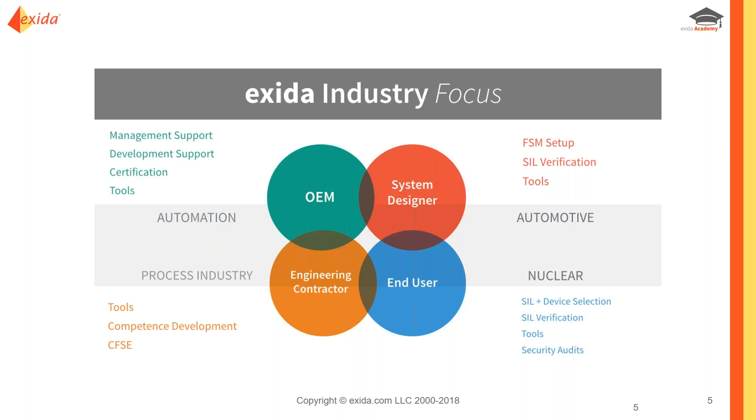We do anything in functional safety, alarm management, cybersecurity, etc. We get involved with the complete supply chain of functional safety across all the different industry sectors. For example, we're going to be doing a lot of fire and gas as we see it becoming an increasing demand in the industry. We deal with anything from original equipment manufacturers who need product certification through to the end users that will actually use these products. That's why we get involved with that complete supply chain or life cycle, anything with training, consulting, procedure related, functional safety, security and reliability is what we focus on. There are 6 different areas we help in: consulting, tools, product certification, training, reference material, and professional certification. Today's webinar will focus within consulting and product certification, sharing the value and why people are even getting things certified, and the consulting aspect is where we'll be talking about flame mapping.

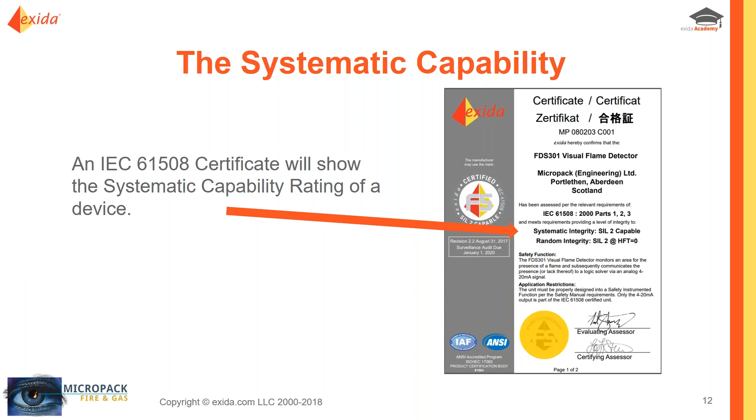When you go to the second obstacle that is cleared, that's your architecture constraints. This second obstacle is either done by the complexity of that device or by field operating history. So you can also call this Route 1H or Route 2H, or you can actually meet architecture constraints both ways, doing 1H and 2H.

Now, there's different SIL tables in 61508 and 61511, and you want to determine this architecture constraints depending on the SIL rating. So the end user will use these tables when they want to develop and create their SIFs. So when you look on the certificate, you'll see that the end user now knows how to calculate the architecture constraints using the 61511 table.

So they can say, HFT equals 0, I can go to this table, okay, it's SIL 2, okay, this is what I need to do to develop my SIF. And so now you're giving them guidance on how to overcome this barrier.

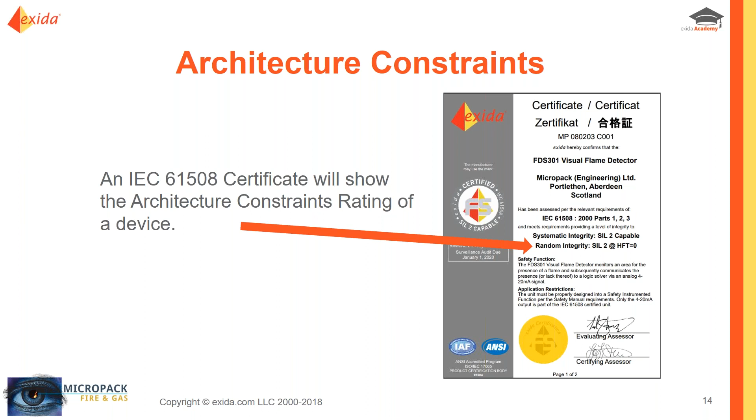The third barrier. When you clear this third barrier, this is when the detector is certified for failure rates for that PFD calculation.

If you're not too familiar with the PFD average calculation, it's basically an equation given in the standard. It has 9 different variables to achieve this PFD average, this probability of failure on demand, based on dangerous failure rates, automatic diagnostics, proof test coverages, test intervals, maintenance, and other conditions controlled by that product and how the end user is going to use this detector or device. From the product certificate, the end user now has the ability to take those failure rates of the device, and with knowledge of these other variables they control, such as how often they're going to be testing the SIF, they can now calculate that PFD average for the SIF.

Every time I talk about this subject, I put that disclaimer in here: it's important to note that this PFD average is not a value that a device manufacturer should be providing. There are too many of the 9 variables from the equation that are going to have to be assumed if that manufacturer wants to provide such a number. So you need to make sure that this is left up to the end user. And if you do see a PFD average number, please do not use it unless you know what those variables are before you use it, right?

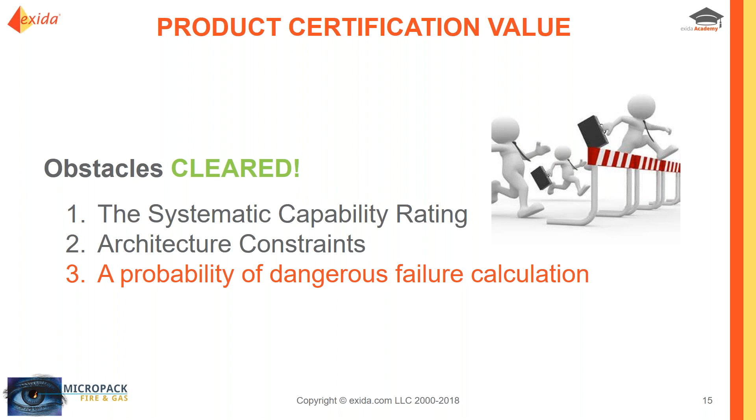That's why one thing for us here at Exida is we used to give examples of how to calculate a PFD average in our reports. We removed it because people were using that as an actual number for their product, and they didn't realize it was just an example. So we've removed that to eliminate that confusion.

So now when you do have these products getting certified, certifying bodies now, for us anyways, publish these failure rate numbers with the different failure modes for the end user. They can now take these failure rates and apply them to their PFD average number.

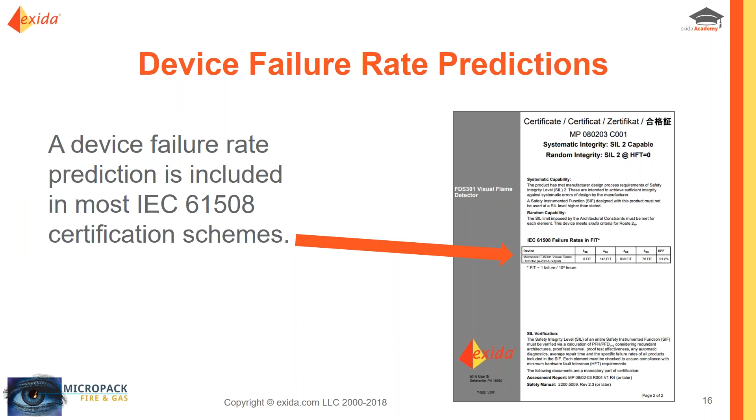If this is something that might be a little confusing, if you need some help, you'll have our contact information at this webinar. Send us an email. We have white papers on how to calculate this PFD average number, because we'd rather help you get through some of these hurdles, whether or not you're a customer of ours, just because I'd rather someone do something correctly than move through thinking they've done something correctly, if that makes sense.

So what is the value to those manufacturers that are getting these products certified? Well, this third-party review of the product, our main objective is to find faults in the design resulting in a lower lifecycle cost, right? We want to find things before there's a redesign or they have to rework things.

And obviously it helps increase the marketing and sales. Why? Because now end users can use something with the assurance that it's already gone through these 3 different obstacles. Sure, there's a cost associated to get something certified, but the goal is there's now a lower risk and an increased savings in the long term. And of course, with these reduced failures at the manufacturing site, there'll be less rework in the field.

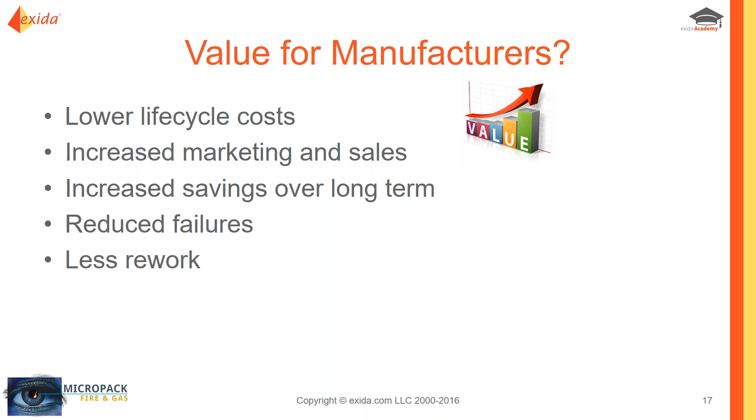What about for an end user? What are the benefits of a product that's certified? Well, hey, you now have a product that's gone through the rigor. It has a better quality management system. It's going to have less spurious trips statistically. You'll have increased safety. You'll have less field failures, a more robust system.

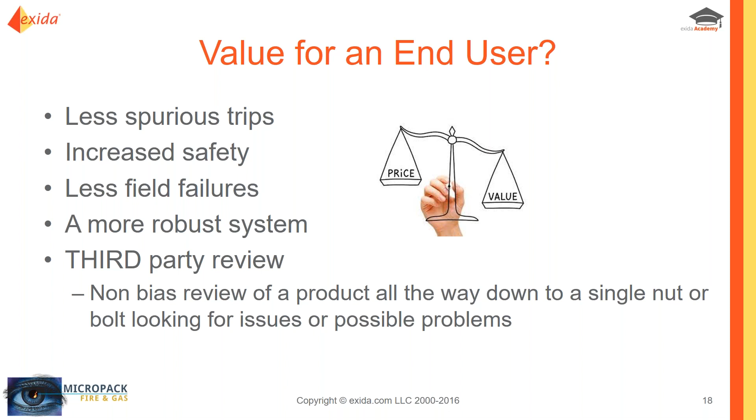And of course, now you have someone that's looked at this product that you are buying. We have a completely non-biased review of the product all the way down, because we do that FMEDA to it, all the way down to the nut and the bolt, looking at issues for possible problems. So we break down every product all the way down to its single components and then build it back up, assigning failure rates to each and every part. And that's where the true value lies and why people are getting products certified.

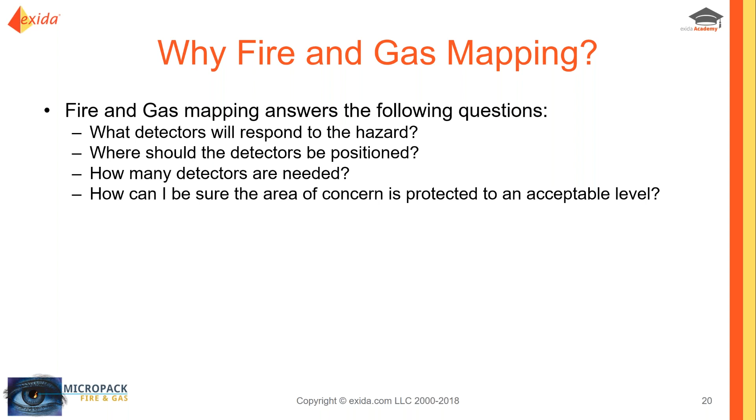In relation to these factors, this webinar is going to show how flame mapping actively contributes to project certainty by looking at how a designer would demonstrate optimised coverage, how they would reduce the time of design compared to the traditional methods, and ultimately we'll move towards producing a detailed design which meets the project objectives with respect to flame detection and also keep project costs competitive with respect to the number of devices that we actually require.

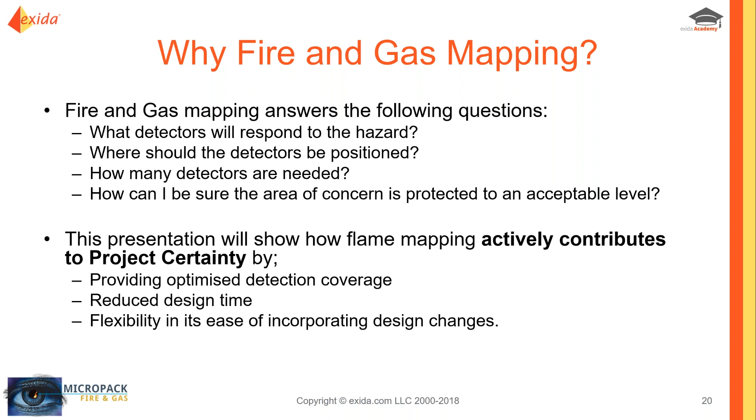So what is fire and gas mapping? Well, it's a bit of a misconception that fire and gas mapping is simply the output of a piece of software. There's two primary factors in what's commonly referred to as fire and gas mapping.

One, the engineering knowledge, which is fundamental in the design. And the second part is the modelling. Each of these factors in fire and gas mapping is crucial, and an adequate design rarely applies only one of these two phases.

With engineering knowledge, the engineer has to identify the hazards of concern such that the escalation potential can be determined. Ultimately, we're limiting the extent to which a fire can grow and cause further damage. So this risk analysis, ultimate performance definition is crucial to an optimised as well as a safe design.

The engineer also has to review any mitigation actions which are required or already in place to make sure that the inputs to the modelling are accurate and that the overall system will actually operate as we want it to operate.

The engineer must also review the detector contributions in order to decide which detectors perform better than others or more effectively. This is not simply from a percentage coverage standpoint though. The engineer has to be able to determine if a detector, if it has a low percentage, is actually reviewing a particularly highly hazardous piece of process. And equally, a detector may have a high percentage coverage, but actually is monitoring a low or negligible hazard area. This detector would probably be able to be optimized.

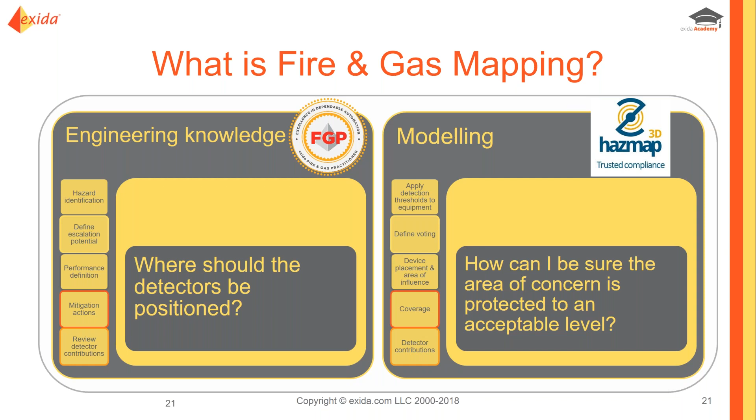The modelling outputs of detector contributions and coverage are obviously also crucial and have to be referred back in the loop to the engineering knowledge to try and determine if our system is adequate.

So looking specifically at flame detection, we first have to appreciate that what we intend to achieve with our detection devices is mitigation. Flame detectors themselves are safety barriers, trying to reduce the escalation of an ignition incident.

We typically expect flame detectors to operate at the second point in, around about fire escalation. Flame detectors are not typically designed to be able to detect the ignition or the incipient stage of a flame, so we actually have to wait until the flame becomes a visible or flickering flame to allow our flame detectors to actually detect that source.

We wouldn't want the fire to continue undetected into the large uncontrollable fire stage, and certainly into the secondary fire stage. So we want to implement our flame detectors to be able to detect small fires to prevent them from becoming much larger fires.

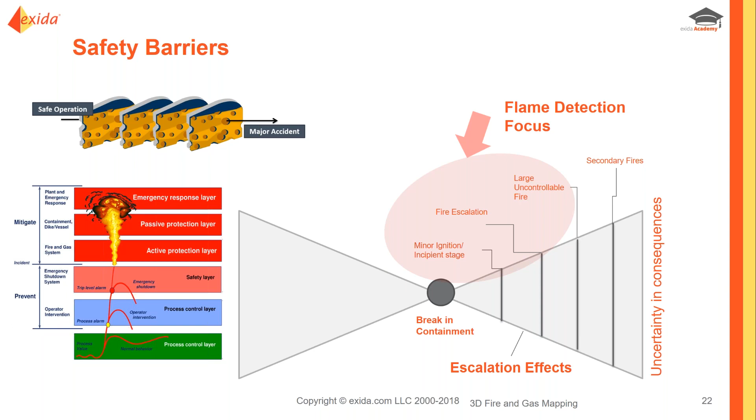So I mentioned earlier on performance targets. Essentially, to summarize what a performance target looks like, it's a formal statement of what fire our detection system should be able to detect, or what we would want it to be able to detect.

If we were to design a performance-based system, which is suitable for the hazards in question, we have to set this target fire size to push us towards not only precise coverage, but also the equipment which is going to pose us the greatest hazard. We don't have guidance like that in NFPA 72 or BS 5839 to design the flame detectors against, as we're typically looking in unpredictable environments, especially if they're external hazards. So this inevitably leads us to performance-based design.

The notion of performance targets is summed up by deciding if you would want the same level of detection in an area where the hazard is a high-pressure gas jet fire from a compressor, for example, compared to a diesel storage area with a finite diesel pool fire as the credible hazard. It's obvious that we don't want the same level of detection in these areas.

Therefore, we can apply a risk-based approach to determine a target fire size specific to that area, which would become difficult or impossible to control. This would essentially then become our performance target with respect to detection for that area or that piece of process.

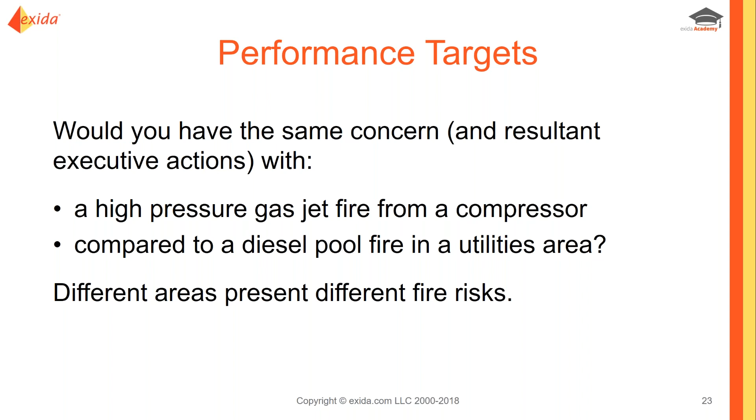If we set our performance target at the size of fire that a gas compressor could result in if it's ruptured and ignited, then we can't credibly detect any fire prior to this stage. Therefore, with a system like that, little or no mitigation is actually provided by the flame detection system.

We also have a special risk grade here, which is quite common, and that's really for areas where none of the standard grades are actually suitable for the hazard. We often refer to this grade as the get-out-of-jail-free card, as the designer gets to choose what size of fire they want to detect to and what the resulting control action should be.

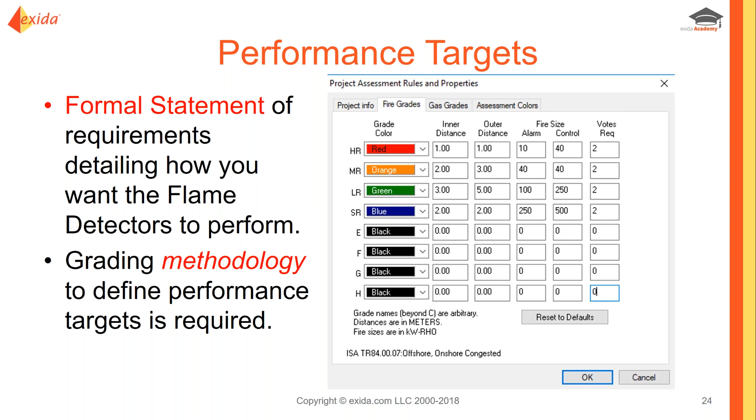So, how do these performance targets actually play into our flame detection mapping? Well, crucially, flame detectors operate based on the inverse square law.

The inverse square law, to put it simply, means that when a fire is small, the flame detector has to be much closer to that fire source to detect the resulting alarm, whereas larger fires can be much further away and achieve the same response. These distances are calculated using the inverse square law to determine how far a specific fire size can be from a detector to give the alarm response.

If we take the standard N-heptane pan fire, for example, which is approximately 40 kilowatts in radiant heat output, if a detector can detect at 30 meters, and we reduce the distance of the detector to the fire to 15 meters, the smallest fire that detector will be able to detect is a 10 kilowatt fire. So we've halved the distance between the detector and the fire, but the smallest fire it will be able to detect is actually a quarter of the size rather than half. And this is the inverse square law in action.

This method works reliably up to fires of about 500 kilowatts in radiant heat output or greater. We start to lose accuracy at that point with sensor saturation and various other environmental factors. But typically you wouldn't want to target fires larger than that anyway in the design, as you lose your ability to mitigate effectively above that range, going back to the safety barrier analysis earlier.

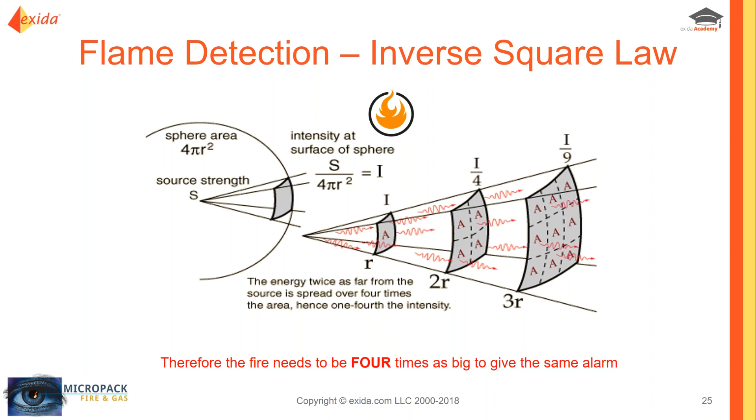They focus in on desensitization of flame detectors in process environments or external environments. And essentially we need to be able to think like the detector that we're placing in the area. It's a highly misunderstood area of design, and desensitization is often overlooked, but it can have serious consequences on site if we don't account for this accurately.

Often engineers will review the device data sheet and assume that the detection distance listed there to the square pan fire is gospel. Now, this is rarely the case, regardless of the technology. A lot of those tests are under lab conditions, and then we place the detector out into an external environment, for example, and the results can change quite drastically.

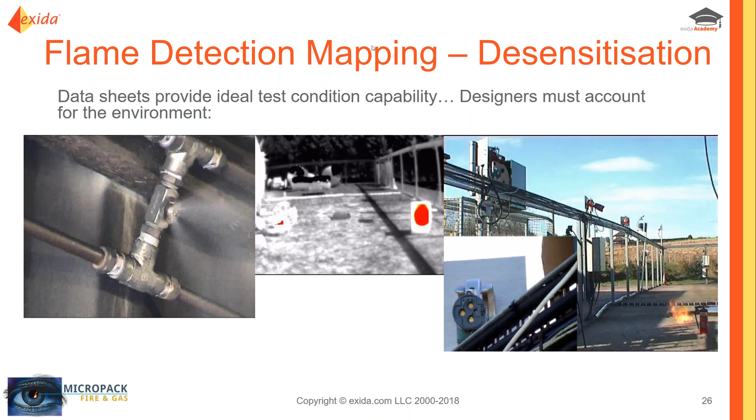Another crucial element in the accuracy of flame detection mapping is accounting for the detector footprint correctly. Each and every flame detection technology, whether it's ultraviolet, visual, or infrared based, has a unique detection footprint. These footprints also vary between manufacturers and models of devices, even within the same technology kit.

The detector footprints can be found in the detector manuals, but it's essentially easier to make sure that the modelling tool accurately reflects the precise make and model of the device being used, so that the coverage analysis can be as accurate as possible and tailored to the device being implemented.

Verifying the detectors against the standard FM3260 test is also useful. These tests analyse each detector against common false alarm sources and desensitizing aspects of an environment. These values are essentially used, again, to increase the accuracy of our mapping.

There may be an occasion where the specific device hasn't yet been selected. In occasions like that, you would typically want to apply a conservative generic footprint, which can then be remodeled at a later date to revalidate those initial design assumptions.

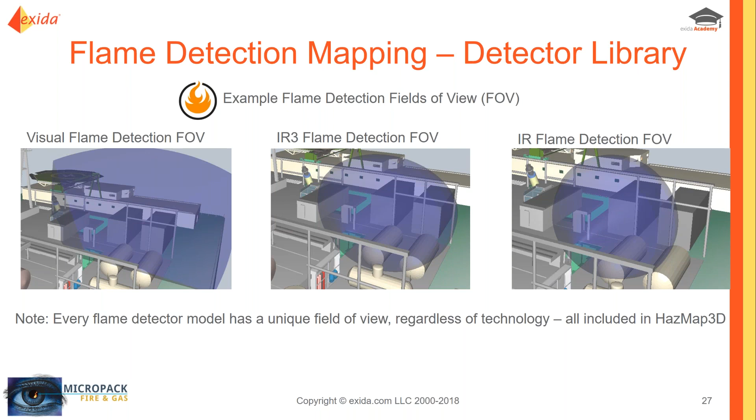So this here is really just showing the typical process of a basic flame mapping model. The first phase would be to import the 3D model of the facility, to ensure that the modelling provides as accurate as possible a representation of the environment being analysed. In this case, we're using the test ground here at Micropack.

We'd then specify our methodology and add our target fire size grades, based on whatever methodology is selected at the start of the process.

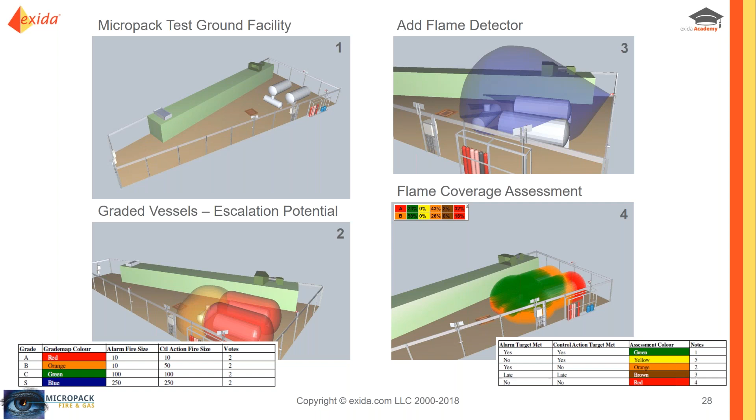The designer then has to add the existing or preliminary flame detectors into the model, making sure that desensitization and the specific flame detector footprint is accounted for. This puts us in the position to run an assessment, generating the coverage maps, which the engineer can then use to determine if the design is adequate or otherwise.

If we look at a basic example here of an offshore module, this represents two different methodologies with respect to flame mapping and the difference in detection design which can be possible. The first example we're going to look at is a geographic volumetric style assessment.

In this example, a moderate risk grade has been applied throughout the volume, meaning a target of 50 kilowatts radiant heat output has been specified throughout that volume. Again, this is the standard test fire which flame detectors are certified against. The voting configuration has been specified at 2 out of n as well.

This method of grading is quite common in basic designs where the optimized volume solution is desired. However, as we'll see, this is a bit of a pitfall in design, and will also emphasize the importance of engineering analysis during the process, rather than solely relying on the software to generate the layout for us.

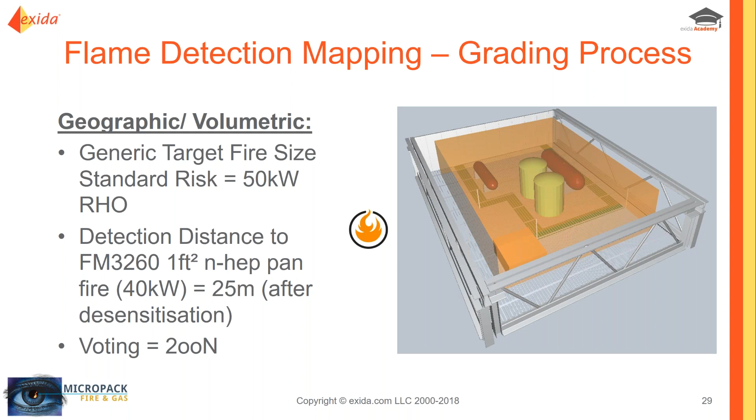When we review the coverage achieved, we can see that 7 devices are required to achieve what we termed as optimal coverage. The field of view of these devices can be seen on the image on the bottom left. As you can see, the software requires detectors to look at basic volumes to increase the percentage coverage, rather than specific equipment where the hazard may occur. The same target fire size has been applied throughout the volume, meaning that we're probably looking at a poor engineering design in this instance.

To note what our coverage percentages represent at the top of the slide: green represents control action, or 2 out of n coverage, to the targeted fire size. Orange represents 1 out of n coverage, or alarm only, again to the specified target fire. Brown represents 1 out of n detection, so alarm only, but only when the fire goes to an unacceptable size. And red represents any blind spots where there's no detection at all.

Looking at a coverage percentage of greater than 70% for control action, we'd be happy from a safety perspective that the area is adequate, but this doesn't show us any form of optimized coverage. Looking at the percentage, the 70% coverage doesn't really even tell us that the safety is adequate. So 70% is a good target, but 30% of the area may be completely uncovered. Even looking for that target 70%, we could assume that the coverage is okay, but again, the engineer would have to go and look into that.

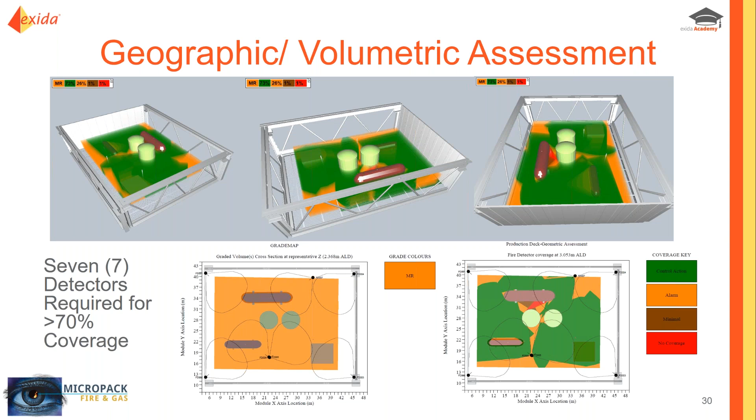So we can look now at a more performance-based approach, which will use a risk assessment and grade each individual piece of equipment based on the escalation potential of a fire within its vicinity.

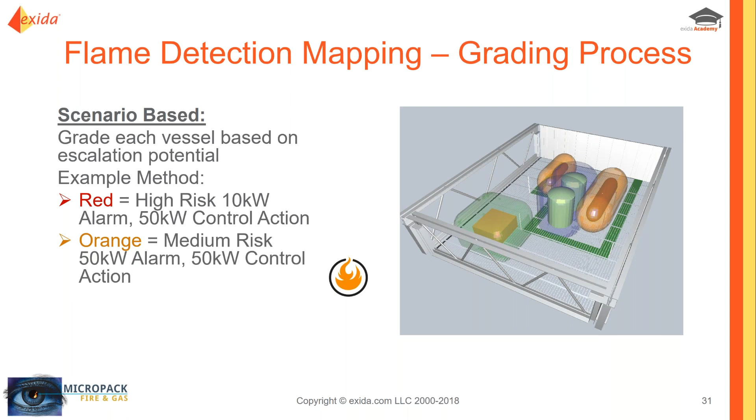Example target fire sizes can be seen here with the equivalent graded volumes, including high, medium, and low risk as red, orange, and green respectively. We also have the special grade color of blue, which we mentioned earlier on. So this method allows us to eliminate wasted detector coverage of areas of very little risk or no risk, targeting our detectors to the areas of concern to detect the fire sizes of concern.

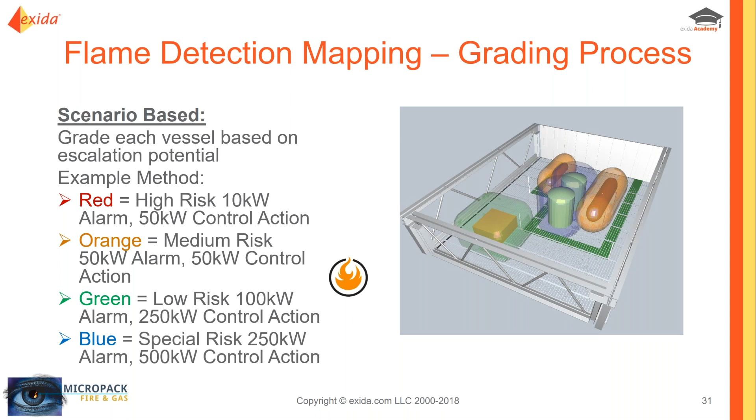So we can see from the assessment that to achieve a comparable coverage of over 70% control action for all grades, we only require 4 detectors in this case. Coverage of each detector can be recorded and logged and audited at a later date with full device location justifications provided for each individual piece of process equipment. We also have the breakdown of coverage percentage listed for each individual grade, which the engineer can interpret and determine if adequacy has been achieved or not.

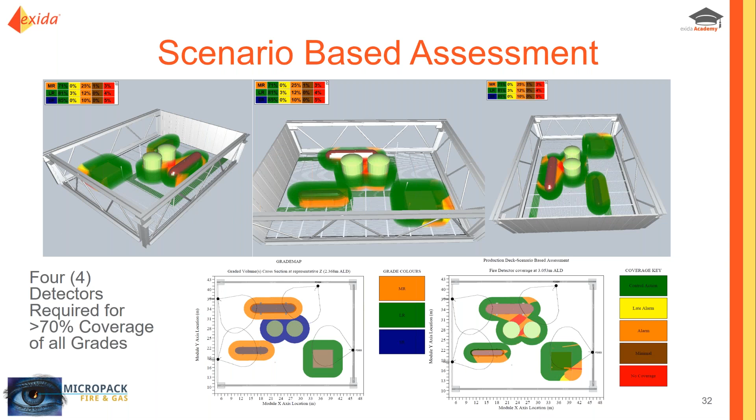In this particular assessment, we also have yellow coverage in addition to the green, orange, brown and red from before. This represents the areas where the fast response alarm target fire size will not be detected, as no detector is close enough to the source to detect a very small fire, but as that fire grows and reaches the target fire size for control action and shutdown, two-out-of-N detection will be achieved and the system would achieve that voted control action coverage. This can be summarised as achieving no fast response alarm, but suitable control action. So that's generally regarded as acceptable coverage, the percentages that fall within that yellow bracket.

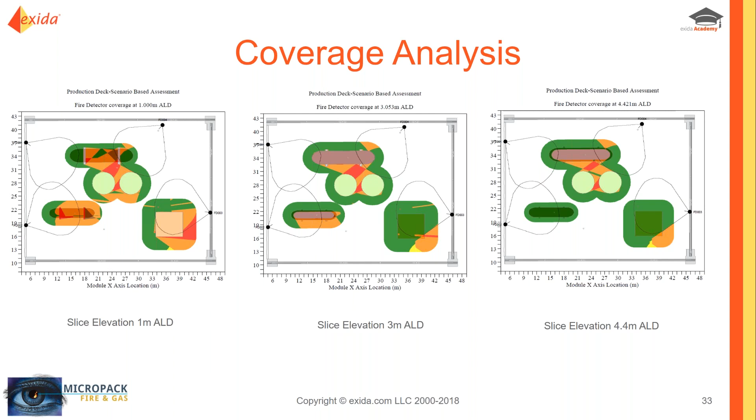When we analyse the coverage in either case, it's important to analyse the area as a three-dimensional volume. We therefore want to review the coverage at varying elevations to assess the adequacy of that layout. This is something, again, that the software can readily analyse. So in this case, we have elevation slices at 1, 3, and 4.4 metres above the local deck. The engineer can look at what the anticipated risk is, the anticipated hazard, and then determine what elevation is of the greatest concern and look at the coverage at that specific slice.

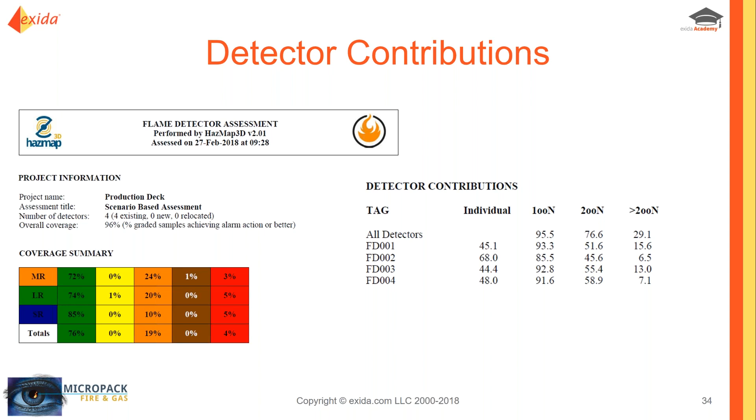So finally, coming back to the issue of overall system reliability. With respect to flame detection, there are 2 different areas which require analysis. Design reliability should be analysed in light of what type and size of fire we want to detect, and through mapping out a system which, within the bounds of engineering judgment, will work whenever there's a demand. This will help to optimise the system and will provide justification of any device placed within the project.

Basing this process on a risk-based method allows us greater scope to optimise the system and can increase the safety of the system by focusing in on those higher risk areas.

We then clearly have to review the device reliability, accounting for hardware and software reliability, the response time of the device, the suitability of the technology as a flame detector, and the reliability of any potential mitigating functions.

So, summarising the importance of each of these factors, we can picture two scenarios. One where a great deal of time, effort and money is spent on fire and gas mapping and purchasing the optimised number of detectors to ensure an adequate level of coverage is provided. The problem in this scenario is that none of the devices are certified as having reliable hardware, and the cheapest option was selected. This would result in a high probability of hardware failure on demand.